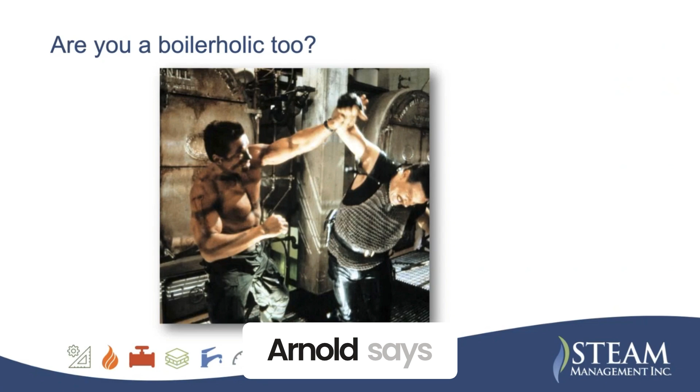Good morning, everybody. Like Chase said, I'm an author of different boiler books and a columnist, and it breaks down to I'm a boilerholic. You're thinking, what is a boilerholic? Well, when I first found out I was a boilerholic, I was watching this iconic movie with Arnold Schwarzenegger and the Chainmail guy. In the movie, they have green steam coming out everywhere, and I'm thinking, wow, green steam. Then at the end of the movie, Arnold rips a pipe off the side of the boiler and throws it right through Chainmail's stomach, and you see this wisp of steam coming out. Arnold says, I'll be back, or he says, let off some steam, Bennett. Right then and there, I thought, oh, that's wrong. Who's servicing these boilers? This is horrible. So it's an affliction I have, and I'm fascinated with boilers, and I hope you are, and have fun with me along the way.

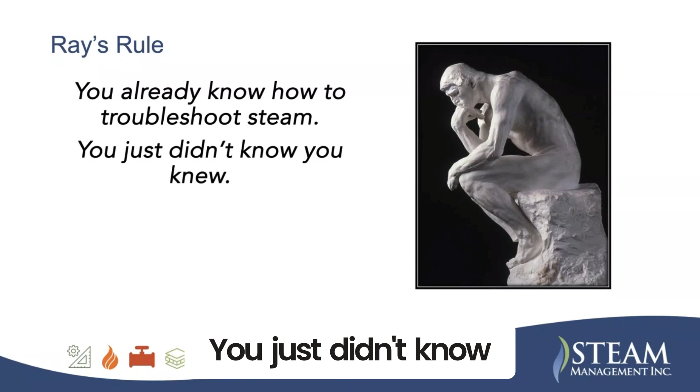When I talk to people and they ask about steam, steam seems to be something that they're confused about. But I have this theory that you already know how to troubleshoot steam, you just didn't know you knew. We're going to go through some of it this morning.

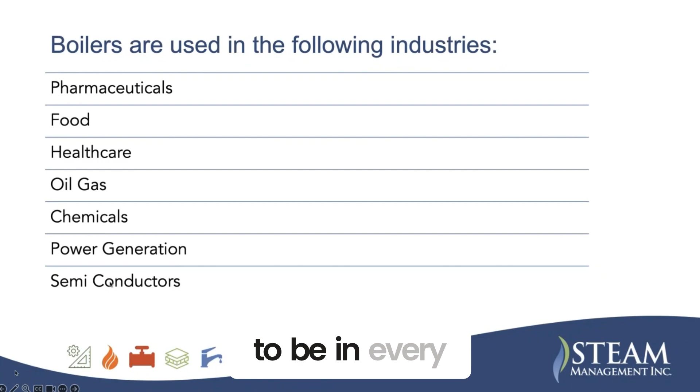Boilers are used, they touch every aspect of your life. They're used in all kinds of different facilities, and they used to be in every building that was heated. But most importantly, I think the biggest bonus for steam boilers is it makes beer. How could it be bad then, right? It's got to be a good thing.

Now I hear people say, 'Oh, steam is not efficient.' People will tell me that all the time, and I say, well, let's look at the Empire State Building in New York City. It's 102 stories high, 1,250 feet high. It heats the building on 2 to 3 pounds of steam. It won a LEED Gold award for efficiency.

And people are like, well, how could that be? That's impossible. Well, steam zooms through a building at speeds of about 50 to 60 miles per hour without using a fan, a compressor, or a pump. It works on steam pressure. And typically, if you're designing a system, for every 100 feet of piping, you'll lose about 2 ounces of steam pressure.

Another thing is, you think about steam or hydronics, water transfers heat 3,500 times better than air. Steam zooms through, like I said, at 50 to 60 miles per hour, without a compressor, pump, or blower. A 1 inch pipe can carry as many BTUs as a 20-inch round duct.

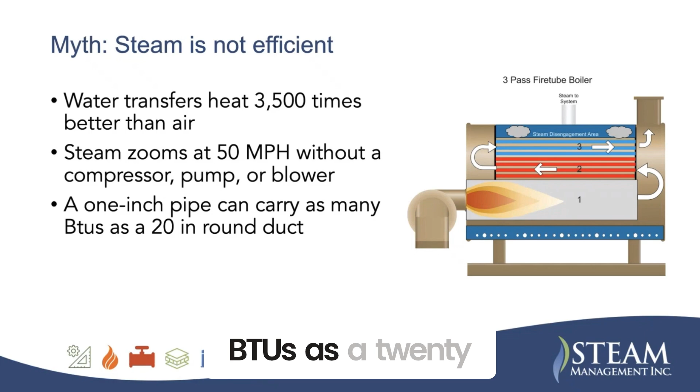Now, people say, 'Oh, boilers are dangerous.' Well, they used to be. They used to be very dangerous. Between 1879 and 1891, in that short 12-year period, there were 2,139 boiler accidents in the United States, one every 48 hours. Over 3,000 people were killed, 4,000 injured. And residential steam systems at that time operated at 60 psi, and they didn't have the operating controls and safety controls we have now. So at one time, they were very dangerous.

I found this on a copper fin boiler site, and they have since taken it down. The engineer doing it was trying to show how their boiler was so much safer than anyone else's. He had the horizontal water tube in the middle, and he said if the cast iron sectional blows up, it's equivalent to 32 pounds of dynamite. And if the horizontal fire tube blows up, it's 63 pounds of dynamite. He said if ours blows up, it's only 10 pounds of dynamite. Well, I don't know about you, but I don't want to be in a room with an ounce of dynamite. They've since taken it down, but I kept it so I can use it in my seminars.

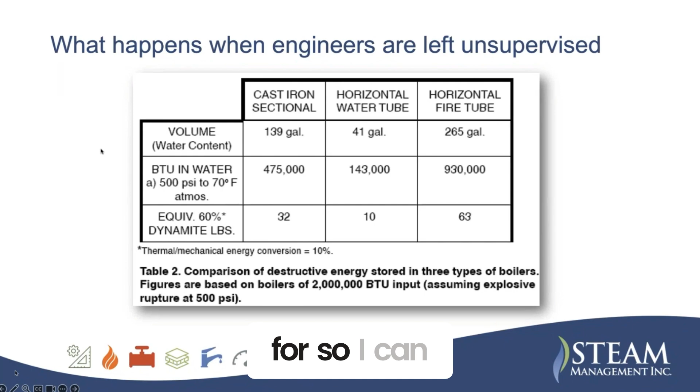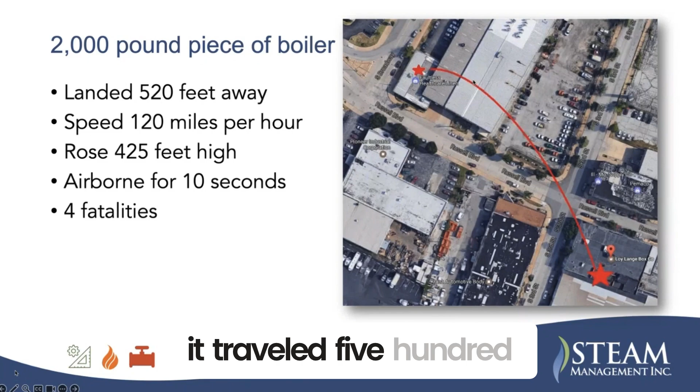But steam boilers can be dangerous. In this St. Louis explosion in 2017, 4 people were killed. It wasn't in this building here, wasn't the one where the steam boiler blew. The 2,000-pound piece of equipment was here, at the box company. It traveled 520 feet away at 120 miles an hour. It was 425 feet high, and it was airborne for 10 seconds. It landed at this healthcare linen place, and 4 people were killed because a piece of the boiler fell down on them.

And then I hear people say, well, boilers are still dangerous. Let me put it into context for you. 500 people die a year from hippos. 150 people die a year from falling coconuts. 100 people die from falling icicles. 13 people die from shaking a vending machine. Less than 10 people die from boilers a year. So you're 30% more likely to die from shaking a vending machine.

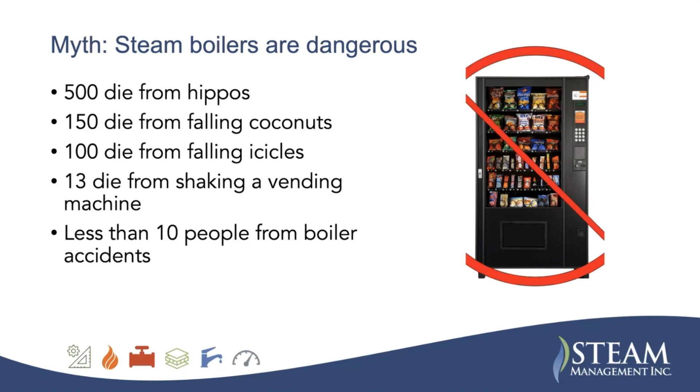I always wonder what it would be like for the person that died that way to go up to the pearly gates and compare notes on how they died. One said, 'Oh, I was hit by the coconut.' Another said, 'I was run over by a hippo.' And then they come to the person that had the vending machine fall on them. I think they'd put them on a little special couch and say, 'Don't talk to anyone else while you're here.'

Ray, that's why I love it. Sorry to interrupt—what maintenance activity do you think is the most crucial for avoiding an accident? There's a lot of maintenance activities going on, but what do you think is neglected the most that could cause an accident? Well, I think the low water cutoff—that's the leading mechanical cause of boiler failures. It should be checked, opened up, and inspected yearly. People just don't do it anymore.

Yeah. Okay. Great. I totally agree with that.

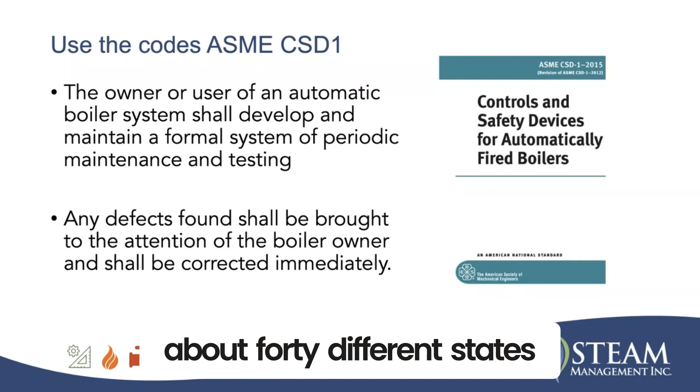ASME CSD1 is in about 40 different states. It's a great code. I tell mechanical contractors or service contractors here, if your state adheres to this, you should get a copy of the code and give it to every one of your service technicians. These are boilers—ASME code CSD1 handles boilers up to 12,500,000 BTUs.

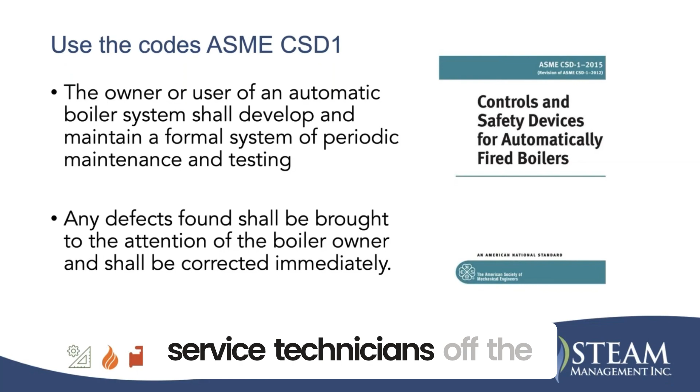The code says the owner or user of an automatic boiler system shall develop and maintain a formal system of periodic maintenance and testing. Any defects found shall be brought to the attention of the boiler owner and shall be corrected immediately. That lets your service technicians off the hook because they say, hey, this needs to be done. If you present the code to the owner, it's not you telling them it has to be done, it's the code saying it. It makes it easier.

Sometimes technicians get a little intimidated by building owners.

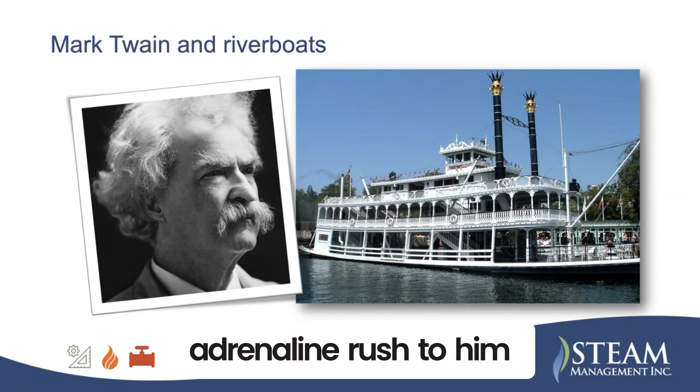When we were in grade school, we used to hear stories about Mark Twain on the riverboats. I thought, why would they even talk about that? He had such reverence and respect for them. What I came to find out was it was a 50-50 chance of a boiler blowing up when you were on a riverboat in Mark Twain's time. So it was an adrenaline rush to him—when he got off the boat and the boiler didn't blow up, he's like, yeah, we made it. Back then everything was done by hand, you didn't have all these automatic controls.

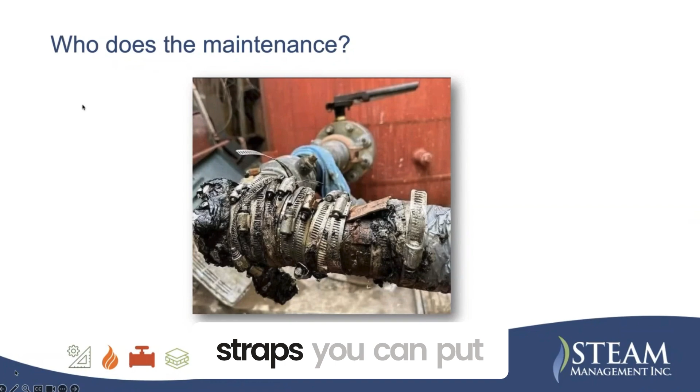Who does the maintenance? I'd love to find the guy that did this—this has to be in the Guinness Book of World Records for how many straps you can put on one pipe. I have people that'll say, well, we don't do maintenance.

There was a hospital I was talking with that said, I don't do maintenance, we have insurance. I said, well, do you mind if I read over what's not covered? So I went through this, and I'm going to read it really quickly. Then at the end, I'd love to hear your thoughts on what's covered.

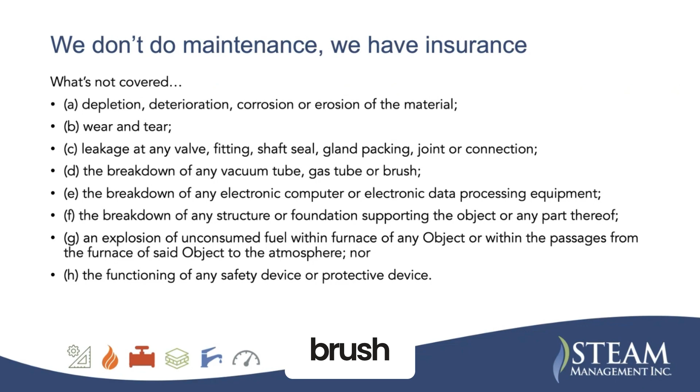Depletion, deterioration, corrosion of material, erosion of material, wear and tear, leakage of any valve, fitting, shaft seal, gland packing, joint or connection, breakdown of any vacuum tube, gas tube, or brush, breakdown of any electronic computer or electronic data processing equipment, the breakdown of any structure or foundation supporting the object or any part thereof, an explosion of unconsumed fuel within the furnace of any object or within passages from the furnace to the atmosphere, the functioning of any safety device or protective device.

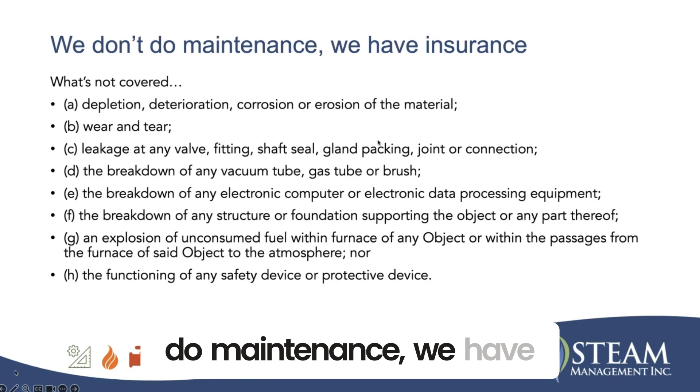What's covered under this policy? Nothing. And when do you typically find out what's covered under someone's insurance policy—before or after an accident? It's usually after the accident. So when a person says we don't have to do maintenance because we have insurance, ask to see their policy.

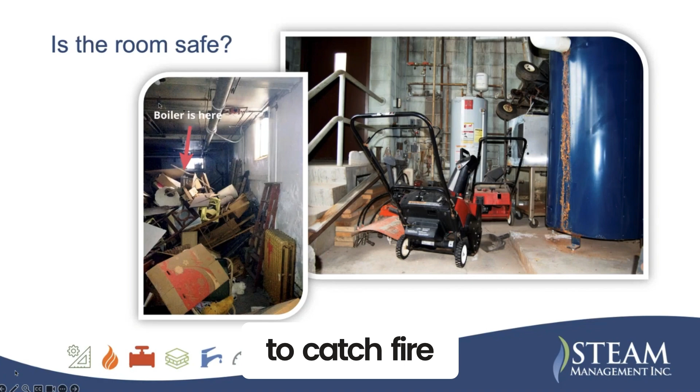The other thing—this is my church, and they never listen to me—I said, whatever you do, don't put gas powered or gasoline inside where the boilers are. The reason is that gasoline fumes are heavier than air, and they'll go right along the floor and get sucked into the boiler and cause it to catch fire. So look around the boiler room, make sure it's safe inside there.

Is there an emergency door switch? These are part of the ASME CSD1 code, and they're awesome. I recommend these highly. If your boiler doesn't have one, I'd urge you to get it in there.

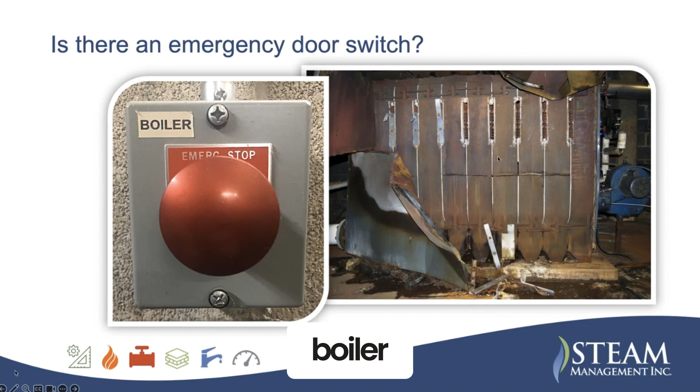They're lucky it didn't explode and take half the building with it. It cracked every section - the ones that aren't cracked on this side were cracked on the other side. All of this could have been avoided if the fire department had found the emergency switch, hit the button, let everything cool down, and figured out what was going on. As a result, it was about a $60,000 to $80,000 repair to replace this boiler, plus the dangers incurred.

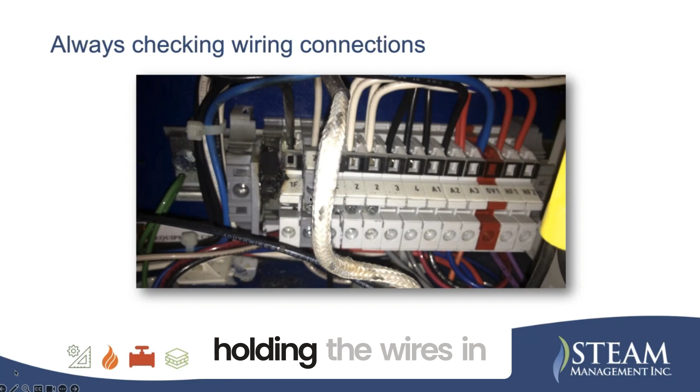Always check the wiring connections on the burner in the boiler. They loosen up after a while, and we check them twice a year when we're out on the job. You can see this one - it's a little tough to see - it completely melted the terminal where L1 was coming in, and we ended up having to change it over. This was a boiler only a couple of years old, and it happened because the screws holding the wires in place were not tightened.

Look for sagging pipes inside the boiler room, where if the hanger came loose, or it's just naturally dropping down, that allows water to pool inside the pipe.

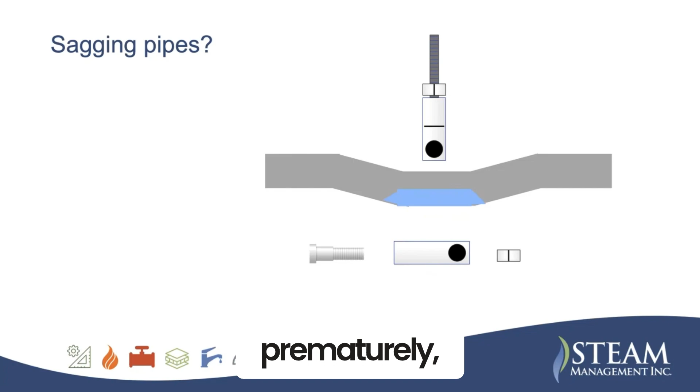When steam hits this pooled water, it causes a phenomenon known as condensate-induced water hammer. I'll show you two examples - Kirsner.org are experts in this, and these images are from their website. It can generate pressures as high as 1,500 psi. What happens is the steam hits the water and collapses prematurely, pulling it into a vacuum and sucking it in.

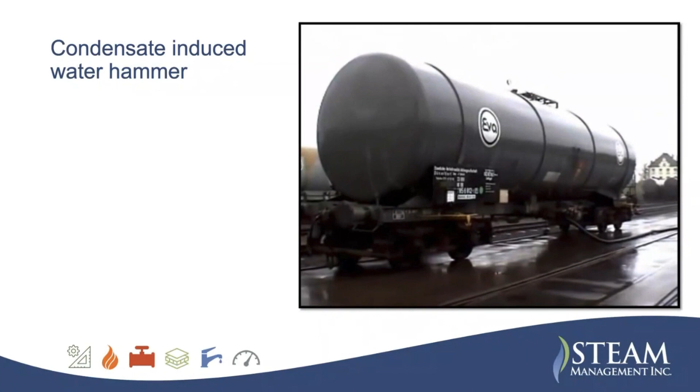You can see this - that's exactly what happens inside a pipe with condensate-induced water hammer. Your pipe is designed not to burst outward, but inward - it sucks it right in just like this. I told you I'm a boilerholic, I collect this stuff. This is crazy.

But anyway, it's scary. Is there carbon monoxide in the boiler room? Carbon monoxide is very dangerous. What happens is carbon monoxide displaces the oxygen in your blood's hemoglobin, forming what's called carboxyhemoglobin. The troubling part is that it has a 5 hour half-life.

Say we were exposed to 500 parts per million and we pulled you out of that building into fresh air - it would take 5 hours for the carbon monoxide level in your blood to drop to half that amount. After another 5 hours, it would drop in half again. Your body really prefers carbon monoxide to oxygen, so you want to make sure you're safe when you walk inside there.

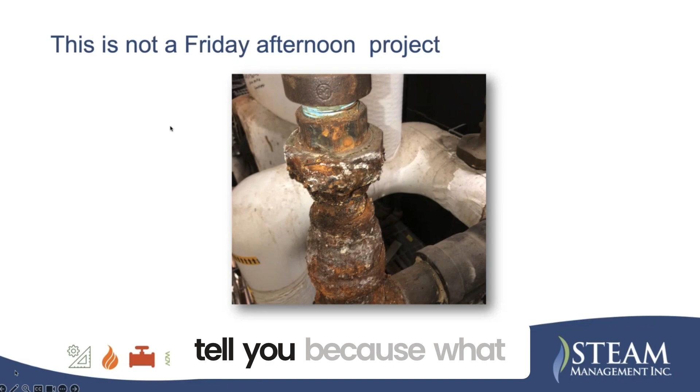Is this a good Friday afternoon project? I would not touch this. If you see something like this, it's a Monday project. I'll just tell you, because as soon as you touch this, everything's going to fall apart and you'll be scrambling all over town trying to find the repair parts to do this.

The low water cutoff is the leading mechanical cause of boiler accidents. The one on the left, you can see all the mud that's up in here. This float was just hanging on the mud, and the boiler dry fired.

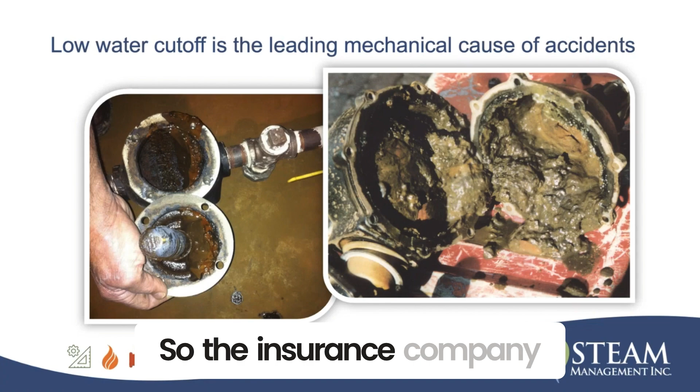It thought it was full of water, but the low water cutoff was actually full of mud. Now, this one, a friend of mine installed in a church in West Virginia. He sent me this picture on a Saturday night. This boiler was only about 9 months old. They had just replaced the boiler before it dry fired, and they never blew down the system or anything. So the insurance company paid for the first, and they told the owner they were only going to pay for

half of the second because they did no maintenance on it. And the owner says, 'Oh, we blow that down every week.' Well, you could see all the crap up in there. There was no way they blew this down. And the one on the right, a friend of mine sent to me, this was a low water cutoff, and you could see it was filled with sludge and mud. There was no way it was going to operate up and down.

Now, the float inside a low water cutoff looks like something inside the toilet bowl on your toilet. So it's a little float that's going to go up and down. That's just what this is here.

Inside the McDonnell Miller 150, these are really common on steam boilers, and we see them. What this has is two switches. This switch over here, the closest to the bottom, is the low water cutoff. This goes in series with all of your safety controls, like the operating control, your limit control. The one on here is what brings on your feed water pump or your boiler feed system.

Now you'll notice that there's some wax that they put on these. That's meant to tell you that you're not supposed to touch these. I've had service technicians that will remove that and try to adjust this up or down, and it doesn't really help. It puts you in responsibility for this, and you don't want that to happen.

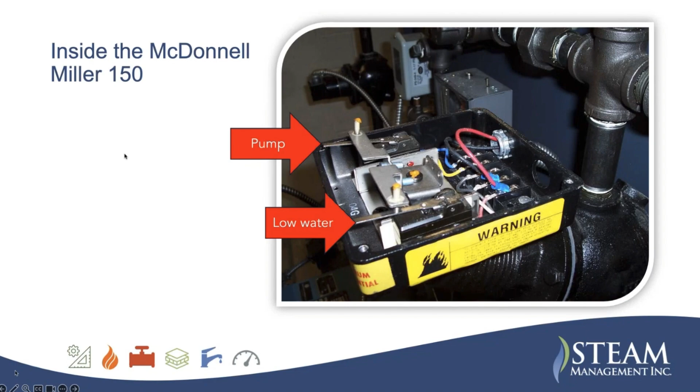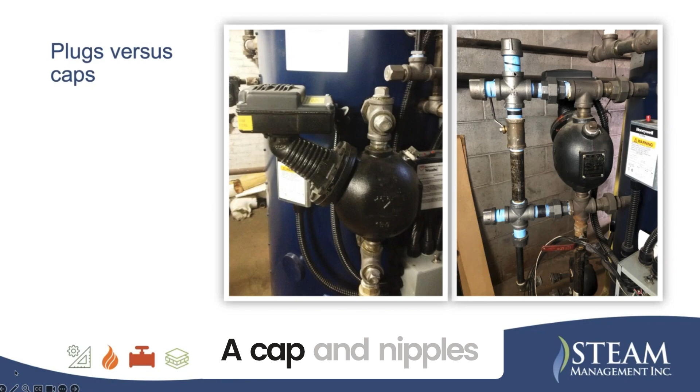What I tell people when I'm talking to service technicians or installers, what I'd love to see are plugs or caps and nipples on the end of the piping going into your low water cutoff. If you have plugs on here, if this side's going to be exposed to steam, this one's going to be down here lower, it's going to be in hot water. These things will rust off. It's really tough to get these out. So if you have a cap and nipples, it's a whole lot easier to remove this.

These have to be opened up every year. This is what senses the water level inside your boiler. This has to be removed. All these caps have to be removed, and this has to be cleaned to make sure it's not plugged so the boiler doesn't dry fire.

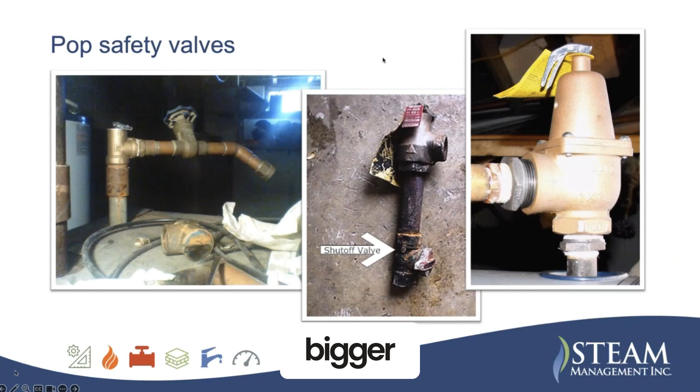Ray, I remember reading about one of the first major locomotive explosions. The stoker, which is what they used to call the guy that shoveled coal into the boiler, was annoyed that the safety relief valve was whistling, so he shoved a rag in it. Oh my goodness, it caused the boiler to explode.

So yeah, no restrictions anywhere in the safety relief, as well as the low water cutoff that you were showing. Can't put any valves on that either? No, oh you can, you're allowed. I mean, you're not allowed to do it, but this is America, and you can do whatever you want sometimes. You're entitled to do dumb things.

The pop safety valves - when I'm doing my classes, I'll look around and say, 'How often do you test your pop safety valves?' And nobody wants to make eye contact with me because nobody does it. I'll ask the group, 'Well, why don't you do it?' And everyone's response is the same: 'If I test it, it will leak.' So you never want to do it on a Friday. These are always a Monday morning job, so you can find a pop safety valve.

So how often should you test it? Watts recommends once a year. Conbraco, which is Apollo, recommends twice a year. And Kunkle says safety relief valves should be operated only often enough to assure that they are in good working order. I have no idea what that means, and I don't think it was an engineer that wrote that. I think it was a lawyer that said, 'Okay, we're going to put this on there and this should take care of it.'

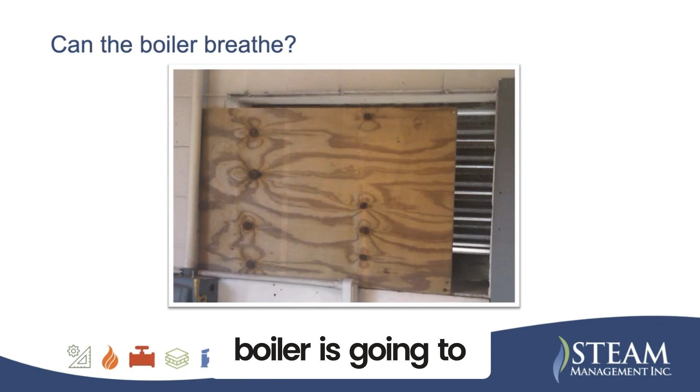Look for leaks. Do you see steam coming out? If you do, get them fixed. It'll destroy your boiler and piping pretty quickly.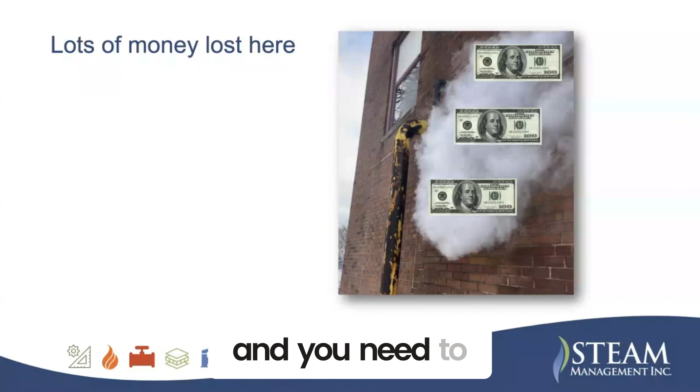This was a relief valve at a school we were looking to consult on, and I saw all the steam coming out of here. I told the guy, I said, 'That's money. That's money you're losing, plus all the equipment you're destroying.' And he's like, 'Oh, we don't have money to fix it.' I said, 'This thing will pay for itself.' So typically, if I see the vent pipe coming off of a boiler feed tank throwing that much steam, it's telling me the steam traps are blowing through and you need to have them fixed.

If you think about steam leaks, they're all coming through at choked flow when they first form, so it's as high a velocity as could possibly go through there with the pressure, and so they erode the pipe even further. It quickly makes the situation worse. That's why the safety relief valves leak, like you were saying - they erode the seal there.

But while I'm already interrupted, we did have a question: any recommendations on condensate and feed water quality? So you can address that now, or if you talk more about that later, you can address it, but just wanted to point that out.

What I would do is talk with your boiler manufacturer about what they recommend, because it's going to be different for each one. Just to use an off the cuff example, what I typically do is pull up the manual for the boiler and show them what they want to do.

One thing I can't urge enough: if you're going to do water treatment, which is recommended for any boiler, make sure you find someone that knows boilers. We had a guy in West Virginia at a university who bought water treatment chemicals from the guy that sold him his cleaning chemicals.

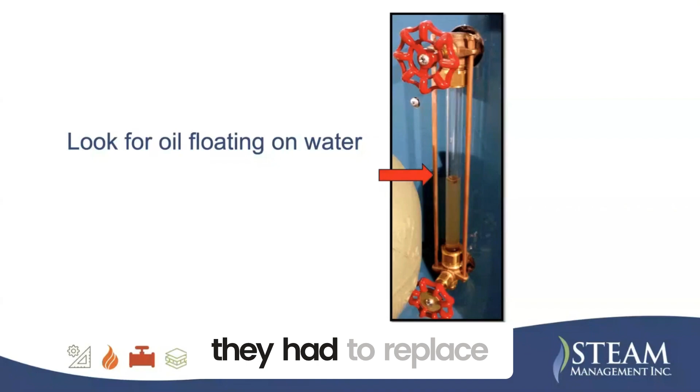He talked them into buying this descaler for inside the boiler, and they said, oh, this will make your boilers just like new. Well, they put this descaler in, and within about a month they had leaks everywhere, like a sprinkler system. The descaler did its job and pulled the scale off, but the scale was the only thing holding the piping together. They had to replace all the boilers in one building and almost a mile of pipe. So make sure you find someone that knows boilers, if I can say that.

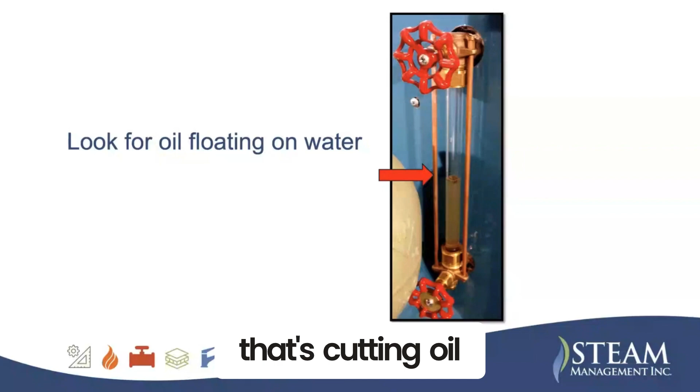When you're looking at the gauge glass, you can see where the red arrow is, that's oil on top. Oil will drive you crazy - it causes bouncing water conditions, carryover, and it will end up going off on low water. Typically the oil comes from piping work done on the boiler, which involves cutting oil, or if it's a brand new boiler, it's the oil used at the factory when machining the equipment. If you see oil, make sure you clean it out.

One thing I'll caution you on - I've had boiler maintenance people drain down the boiler and refill it with fresh water. Well, that oil adheres to all the metal sides on the water side of the boiler. So when you bring that water back in, it bounces right to the top of the water level and says, hey, I'm back. So you want to be able to clean that oil, and check with the boiler manufacturer for what they recommend.

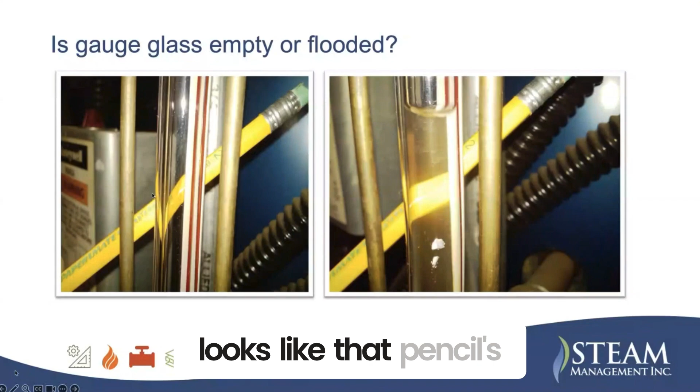How can you tell if the gauge glass is empty or full? One trick I learned from Dan Holohan, the boiler expert, is to hold a pencil behind the gauge glass. If you look on the left, it almost looks like that pencil's intact - that's telling me the gauge glass is empty. If you look on the right, it looks like it's broken on a 45-degree angle - that's telling me there's water in there. So if you hold a pencil up behind it, if it looks broken, it's flooded; if it looks pretty much straight through, it's empty.

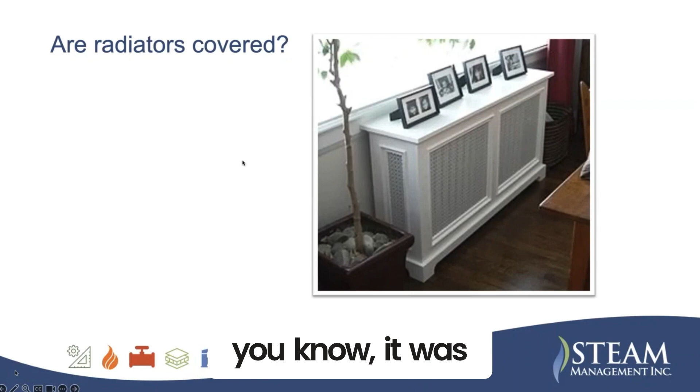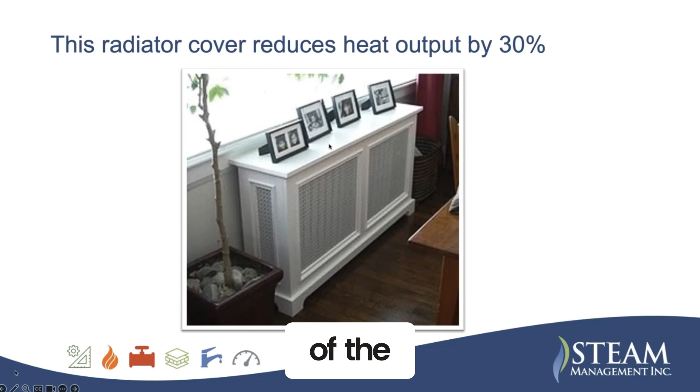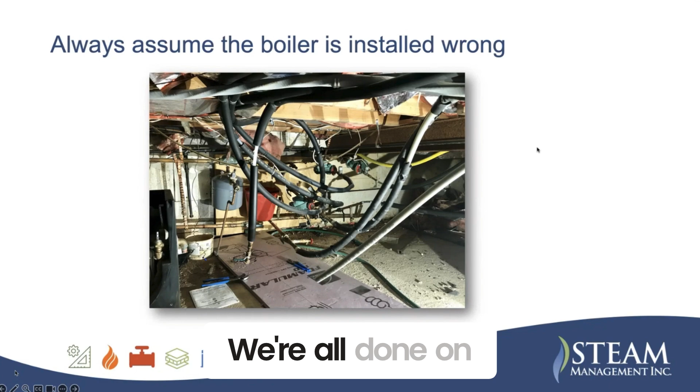Always assume the boiler was installed wrong. I can't believe the guy walked away from this and said, yep, we're all done on that job. So one thing I wanted to talk about - steam works opposite of what you think.

So if you're working on a steam system, yes... Hey Ray, sorry to interrupt, I got another question here. Building is heating differently at different areas of the building. Tried bleeding the system and it helped a little. Anything you recommend? What could be the problem?

Sounds like it's a hydronic system. You could probably reduce some of the flow to the areas that are overheating, and that'll force more water into the areas that aren't heating. Or you can make sure there's no air in the system - if you bled it, there is no air then.

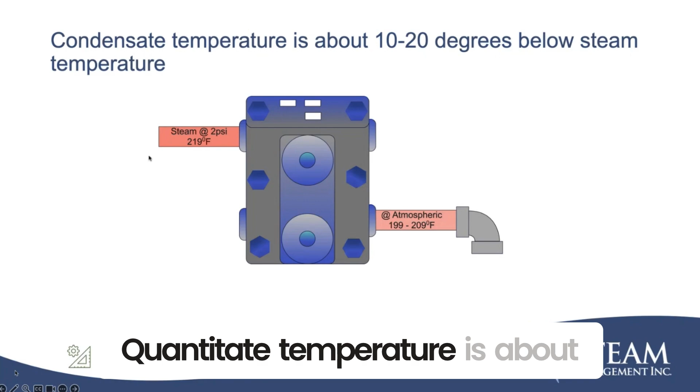Condensate temperature is about 10 to 20 degrees below the steam temperature. So if you know what kind of steam pressure you're running, say at 219 degrees, the condensate temperature is going to be about 10 to 20 degrees below that.

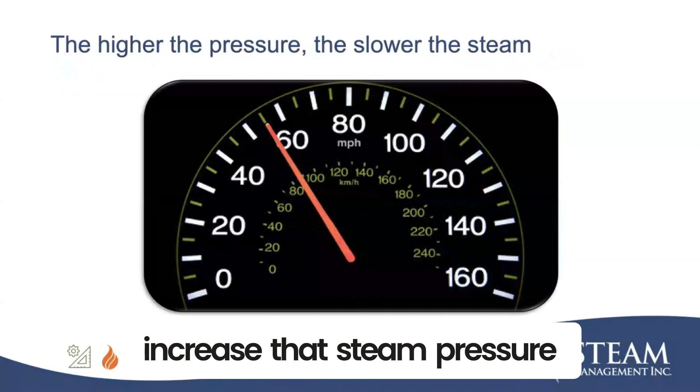The higher the pressure, the slower the steam, right? It goes against everything we're saying. We want steam to get there faster. You think, well, I'm going to increase that steam pressure. All that does is slow it down. Compare velocity. Say we have 100 psi steam pressure.

The velocity of the steam in a 2.5-inch pipe at 300 pounds per hour will be almost 10 feet per second. If we lowered that down to 15 psi, the speed increases up to almost 35 feet per second. So it's substantial. The idea is on a steam system, you want to keep the pressure as low as you can, so it'll get to the system faster.

But there's going to be an issue. We had a hospital here that had someone come in, and they had their system on the left, and everything was set for 100 psi, and they had the limit at 150.

And they said, hey, we have this great idea. We only need 100 psi when the laundry is running. When the laundry's not running, we don't need that much. So they put in a complete set of modulating controls and operating controls. So when the laundry shut down at 3 o'clock, they switched it over.

Now, what happened is as soon as they did that, they started noticing all kinds of carryover, bouncing water levels in the boiler. It was going off on low water.

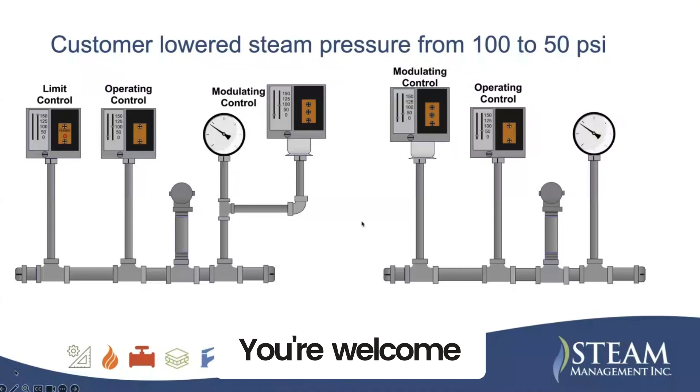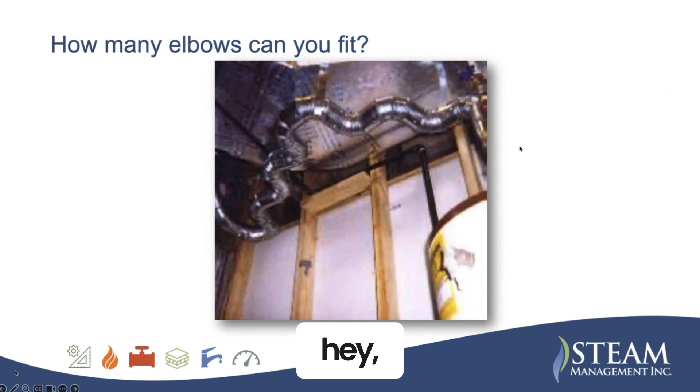How many elbows can you fit? I love this picture, Backrack gave it to me, came from one of their books, from an actual Polaroid, so it's not that good. The guy used 13, 90s to put this in there, and then he was so proud of it that he made sure it was hung up and kept this way. So if you see something like this, hey, there's a problem. We're getting close to the edge, close to the end.

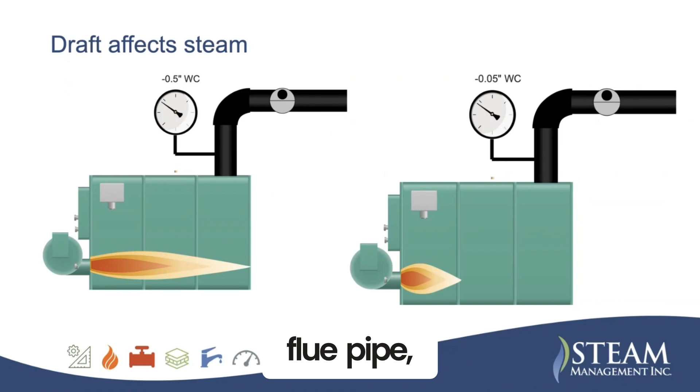Draft affects steam. I got called as a consultant in Wisconsin. They were having all kinds of problems with a boiler, it was tripping on low water all the time, and there was a lawsuit pending, so they brought me out as an expert witness. When I looked at the draft gauge, it read 0.5 inches water column. I said to the owner, it's supposed to be 0.05 inches water column. He said, what's the difference? I said, one is 10 times more than the other. So at 0.5, it was pulling the flames into the boiler and actually up into the stack. We found the barometric damper was too small. They had a 20-inch flue pipe stack and were running an 8-inch barometric damper. Once they put a 20-inch barometric damper on, the draft dropped and the boiler level settled right in. It was great. So draft will really affect the steam in your system.

Now I wanted to show you this just to show you how a chimney affects draft. This was kind of interesting, and then we can stop for questions whenever you want.

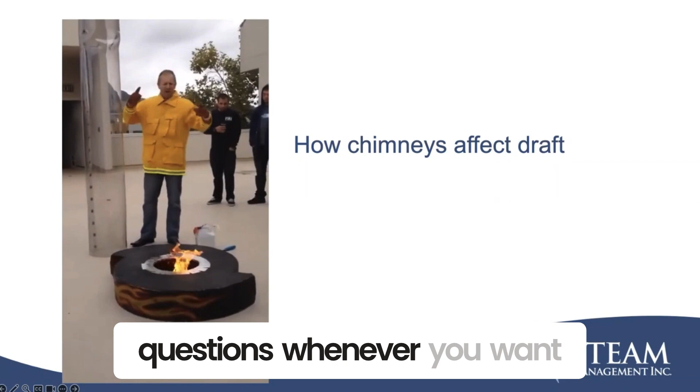Yeah, I don't have a life. I watch this stuff.

That's what a chimney does. It pulls your flue gases through your boiler and up the stack.

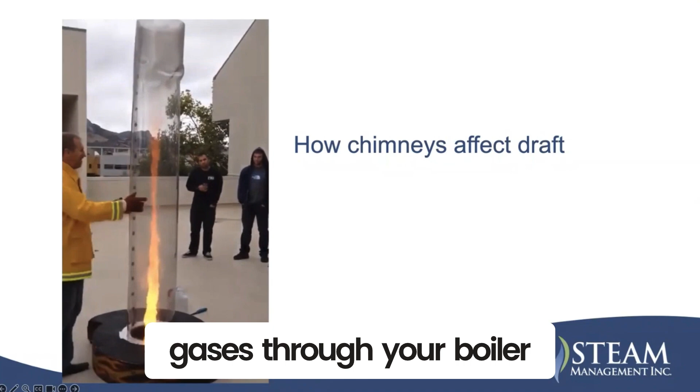Well, anyway, oh, what happened? I don't know, did I do that? Yeah, I was thinking it. We're still seeing your screen, so I think you just have to pull it back up. I don't know what happened there, let me find out. Okay, let me see why it's doing what it's doing, I'm not sure why. Let me get it back online again. I'm sorry. No problem, never had that happen before.

Here we are. Okay, everybody can see that?

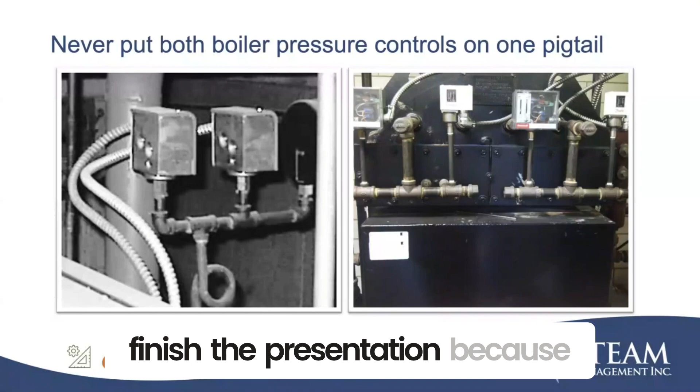Someone asked Ray, which safety regulation do you follow in the U.S.? We have Indian Boiler Regulation IBR 1950 in India. Oh my God, we have so many. Yeah, it's ASME.

It depends where you're located. We have so many different codes that you have to follow, so it just depends on your location, and they go by the versions too. Some states will have the latest version, some states will have versions from 6 or 8 years ago. So it's really hard to say one specific code. I hope I didn't mean to evade your question, but it is tough. There's also insurance standards, and different codes within the codes for different pressure levels.

I wonder if there's anyone from Honeywell here. Honeywell, I love them to death, but they do stuff just to mess with people. If you're looking at your pressure control, the two of these here - the one on the left with the mercury bulb is a subtractive type of pressure control, and the one on the right is what's called an additive. It really confuses people when you're going out there.

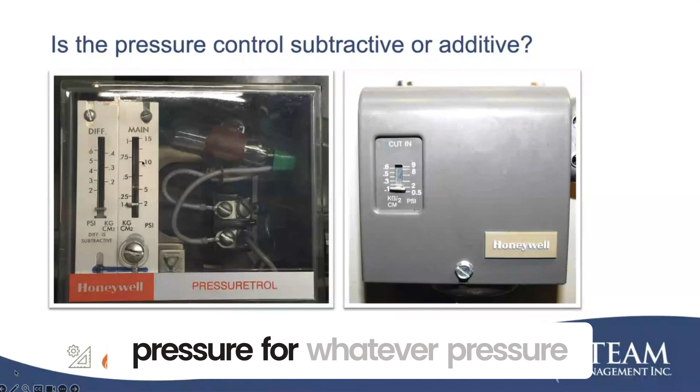What this subtractive one does is you set the pressure for whatever pressure you want, and that's where the boiler will shut off. So if we have this set for 5 and we set this for 5, the boiler will shut off at 5. Then it goes by your differential on this side. Say we have this set for 5 and this one's set for 2 - that means your boiler on a call for heat will operate between 2 and 5 psi.

This one is what's called a cut-in type. This is where the boiler starts. So we will set this for where the boiler starts - we want it to start at 2 psi - and then inside there's a differential adjustment on a little white knob, and you set it that way. So when you're looking at it and asking how do I set my pressure, you have to ask, is it subtractive or additive?

Here's what I talked about where Conbraco says, under no circumstances should this margin be less than 5 psi. So if this is a 15 psi relief valve, they don't want you running your boiler higher than 10 psi.

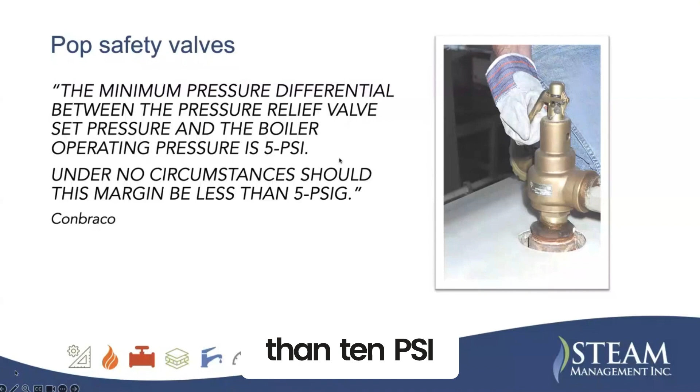If you get banging pipes - we see this a lot where they'll put in zone valves, and we kind of got rid of it as steam systems went away, but we still see this on breweries and other items. So what happens is, if you look at this system, they were having all kinds of banging. Like I said, you already know the problem, you just didn't know you knew it. What happens is when this valve shuts down here, the Honeywell on the right, all that condensate that's up in here - all the steam condenses and lays against this valve.

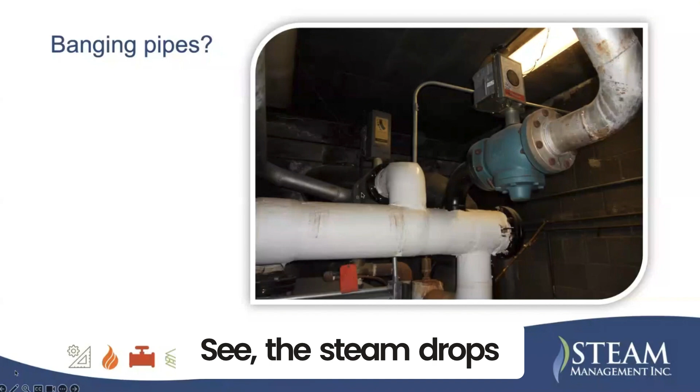So now when this valve opens up the next time they have a call for heat, what happens to all that condensate? It goes flying up here at 60 or 50 miles an hour and hits the nearest fitting. So if you have valves like this, you have to be able to drain this down and trap it so you don't have water laying against the seat of this valve. It depends which way it's pitching - if it's pitching to the right, like this one, you want to trap this side; if it's pitching back to the left, you want to trap this side. You want to trap it where the water is going to lay against the seat.

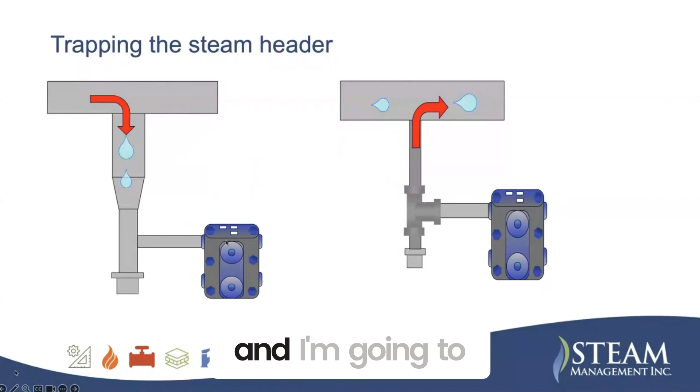A lot of times guys will say, okay, I'm going to trap this header, maybe it's a 6 or 12-inch header and I only need a 3/4-inch trap, so I'll just run 3/4 inch down here. But you do need the reducing fitting, because steam is zooming through at 50 or 60 miles an hour. It'll pull this condensate right up and along, so it won't be vented out through the trap. If you keep it at the same pipe diameter, the water drops down and there's no way the velocity is going to pull it out like a Venturi effect.

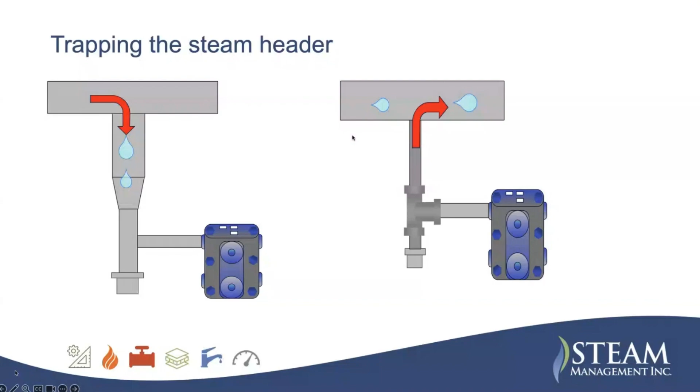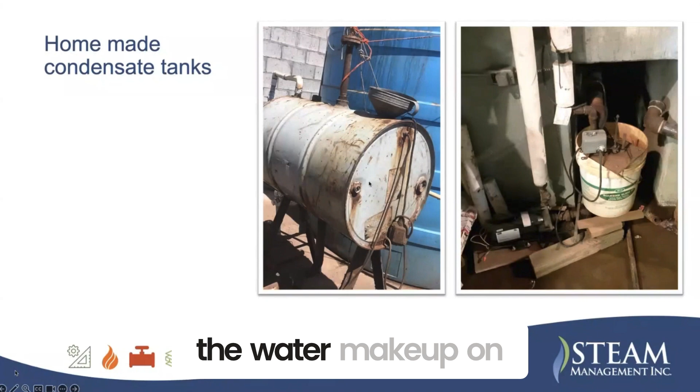This guy made a homemade boiler feed tank. I loved it - he got an old 55-gallon drum and put the water makeup on here. This one used this as a condensate tank. He used a plastic garbage bucket, and here's the pump down here. That's what he used because his condensate tank went bad.

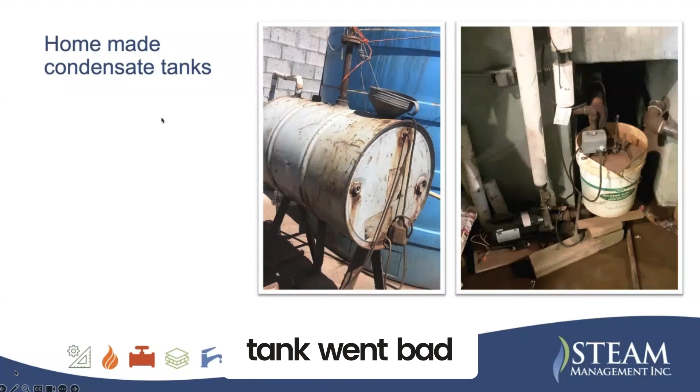Looks like he's got a rain - that funnel is like a rain collector or something.

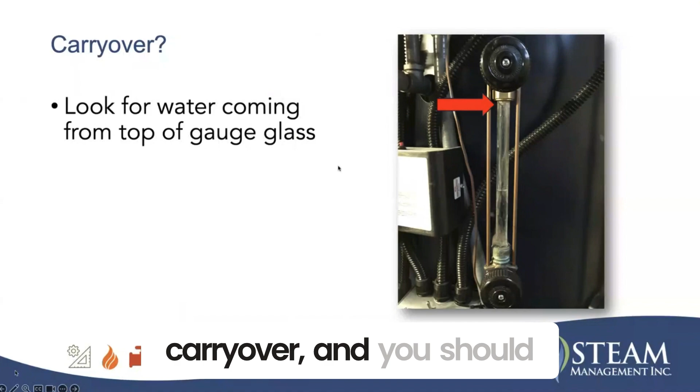One of the most confusing things is people will say, what's carryover? A metaphor I use for carryover is: let's say you're out camping making s'mores, you've got your marshmallows over the fire getting ready to put them between chocolate and a graham cracker, and some jerk comes running over and throws water on your fire and laughs about it. That's what carryover does - it takes all the energy out of the steam and causes it to condense a lot quicker than it's supposed to. One thing you can do to look for carryover is look at the top of your gauge glass. If you see water coming over the top and dripping down, it's telling you that you have carryover, and you should check it with the chemical treatment company.

What is carryover? This was done by Weil-McLain, and all this water up here is all carryover. I'm going to show you what this thing does - you can see it all coming up over here.

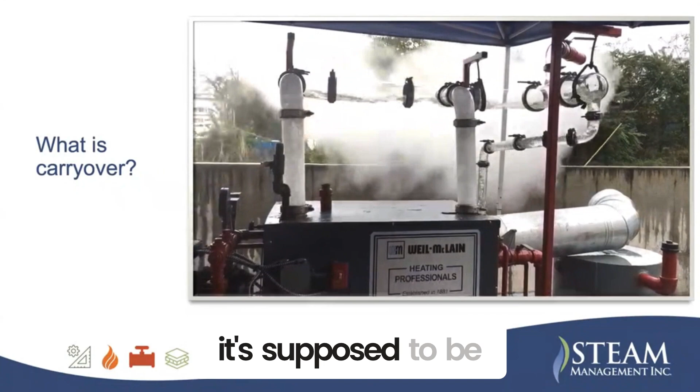That's carryover, and this boiler is piped the way it's supposed to be. It's got a 24-inch riser above here. On this particular one, they had one boiler piped like this and the other boiler piped like this. Why did they use the extra fittings here? Well, this is a swing joint. When steam piping is connected to a cast iron boiler, they expand at different rates. On this particular one, the steam piping expanded at a greater rate than the cast iron section did, so it pulled it all apart and they started having leaks everywhere. Whereas this swing joint allows it to go back and forth and absorb some of the expansion and contraction.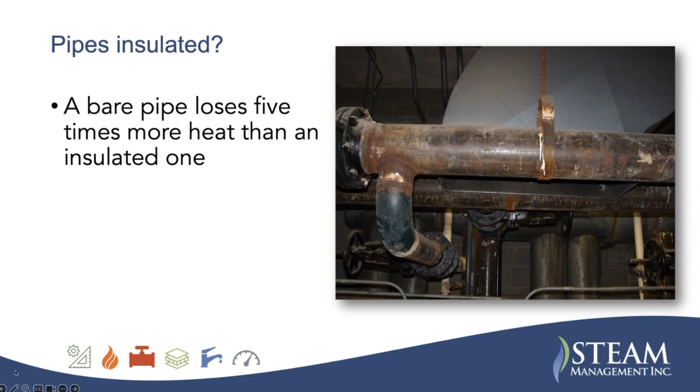Steam pipes need to be insulated. A bare steam pipe loses 5 times more heat than an insulated one. You might think that just makes a room warm, but what it does is cause your steam to condense, and it's this ripple effect - like pushing a snowball down a hill, it turns into an avalanche after a while, until you get steam stall and you won't be able to get your steam to flow through. An uninsulated pipe produces 600% more condensate than an insulated pipe, so it could overload the steam trap. Also, this steam trap was sized for an insulated steam pipe, and now it's not - if someone pulled the insulation off or repaired a leak, now it's undersized for the load.

Steam doesn't care about your flow arrows. I know you hate to hear that, but if steam's going this way and air's over here, it's going to go from high to low, no matter which way. So say it starts to condense over here and it starts to pull into a vacuum. The arrows say it's supposed to go to the right, but it's actually going to go shooting back to the left.

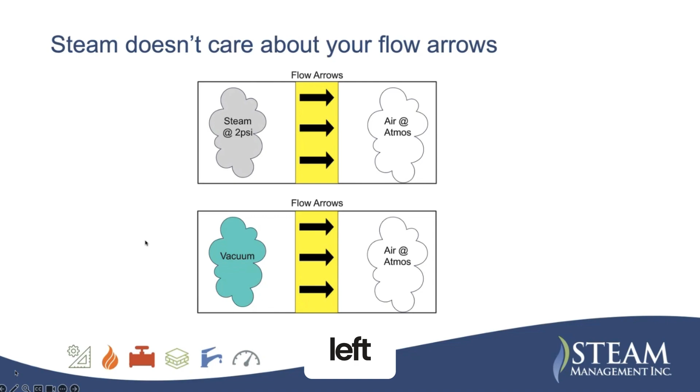Pressure goes from high to low. On this one, we have an insulated tank, and this one is non-insulated. So the steam flow is supposed to go this way. Well, if this is non-insulated, it's going to condense more. Your steam is actually going to come back this way quicker. It goes backwards. Steam systems need to breathe.

And that's why we saw that boiler feed tank or the condensate tank that exploded and it turned it into a bomb. When you look at a steam system, when it's cold, it's filled with air. Most of it, 90% of it's filled with air. The only thing that has water is the boiler and maybe the water line in the condensate tank.

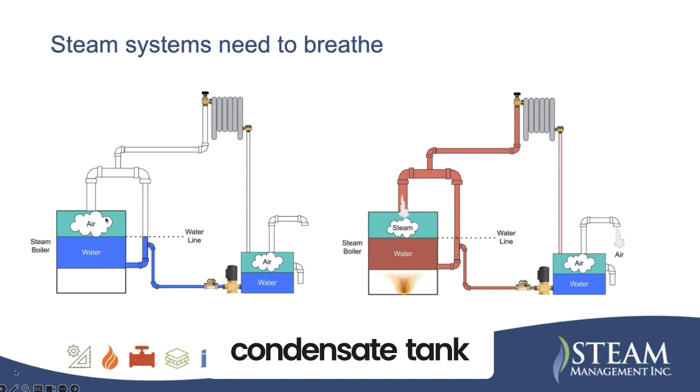So as we start to heat this up and it turns to steam - two gases can't occupy the same space. So the steam forms, it's a higher pressure than air, so it starts to push it out. And it goes up through the radiator, out the steam trap, and out the valve. So it pushes all the air out of here. So now when this thing is hot, it's all filled with steam. There's no air inside here, hardly any air.

So when it shuts off, all that steam condenses. Remember, it said that it was expanded at 1,600 times its volume. So now it will condense and drop down to 1/1600th of the space it occupied. So what's going to take the place of it? Air comes rushing back in and fills up the piping. So this thing is doing it all the time, back and forth.

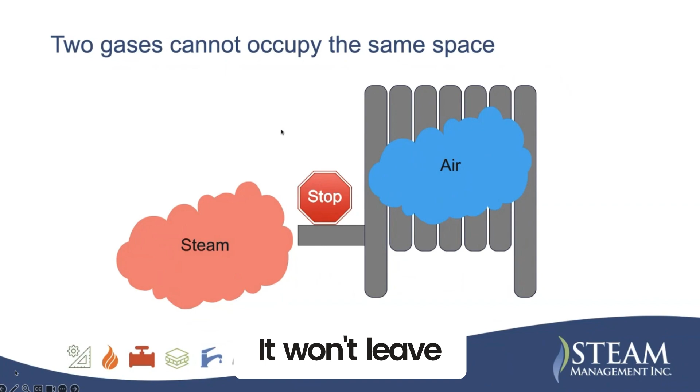And essentially, it's like breathing, is what I use as a metaphor. Like I said, two gases can't occupy the same space. If there's air in a radiator or in a pipe or in a piece of equipment, I can't get steam in there. It won't leave. And one of the things that's a little bit confusing about air is the warmer the air, the greater the volume. But with steam, the higher the pressure and temperature, the smaller the volume. So it likes to mess with your head a little bit.

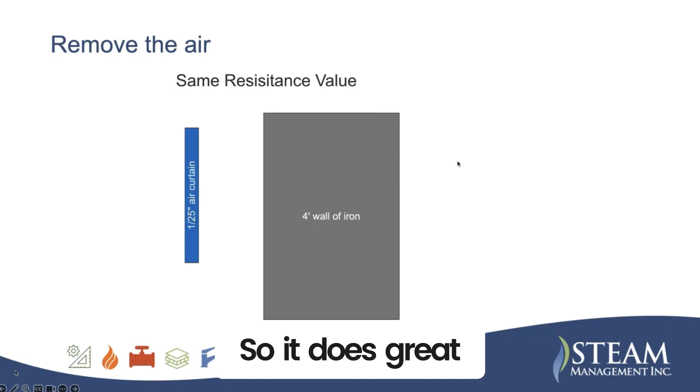We want to get air out of a system, out of a steam system. Just to give you an idea, you have a 1/25th of an inch air column, air curtain of air inside there. That has the same R value as a 4-foot thick wall of iron. So it does great insulation. That's why they put it between the window panes.

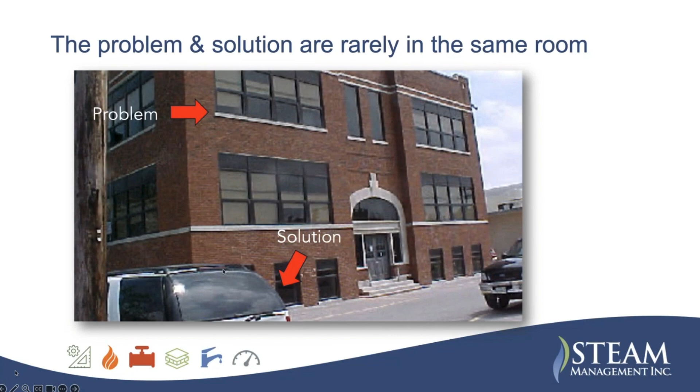The problem and the solution are rarely in the same room. We had a problem in this particular classroom on this school, and we found the solution down in the basement, down in here. What happens is when the condensate was coming down, it went down into the system, and one of the hangers fell off. They removed the asbestos down there, and it was sagging, so the air couldn't get out. Once we lifted that pipe up and put it back in the hanger, it ended up working just like it was supposed to.

What does a steam trap do? It vents air and non-condensables, but more importantly, it allows the system to breathe. So it vents air out when it's steaming, and it allows air back in when the steam is condensing.

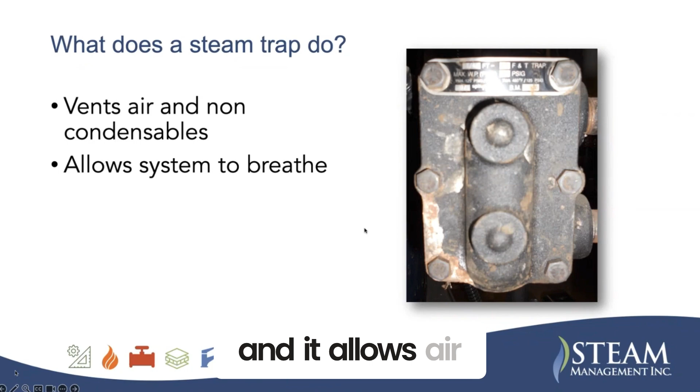Traps are workhorses. How long will they last? Well, a trap opens and closes about 360,000 times per heating season, or over 1 million cycles in 3 years. This is based upon 4,000 heating hours, which I have in my area.

I see people that have traps 20, 30 years old, but a lot of times the new ones aren't going to last nearly that long. Most experts say the thermostatic element, which allows the air out, lasts about 3 seasons, and the float lasts about 6 years.

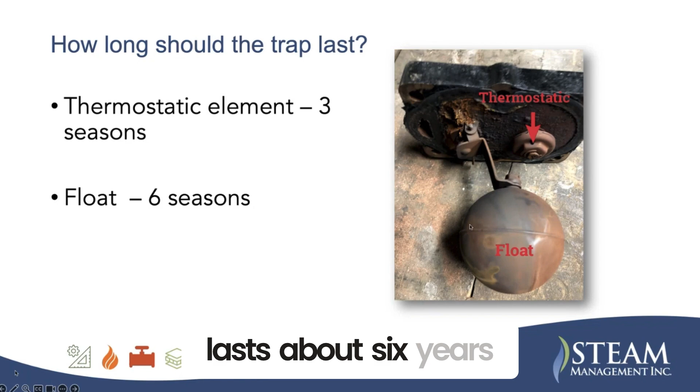Steam traps should never be sized for the steam pipe. Let's say we have a steam pipe going to the end of our building, and it's 800,000 BTU with 640,000 BTU out. We're trying to maintain about 40 feet per second in velocity. Anything over that, we could start getting carryover. So what that's telling me is we're going to need a 6-inch pipe here.

Well, what size should our steam trap be? If you look at the Spirax Sarco FT15, I can vent this 6-inch pipe. I can get the trap to the 6-inch pipe with a 3/4-inch trap. It'll give me 650 pounds of condensate, and that's what this thing is throwing out. More than that.

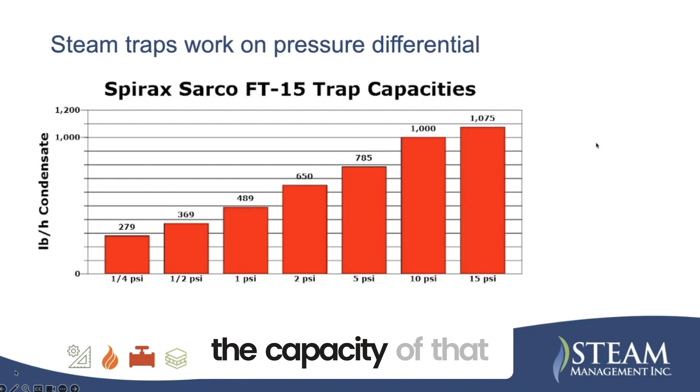The higher the differential pressure between the inlet and the outlet of the trap, the higher the capacity of that trap. One of the things we see is if you have 15 psi on the inlet of the trap and 15 on the outlet, is this thing going to move much condensate? No, hardly any at all.

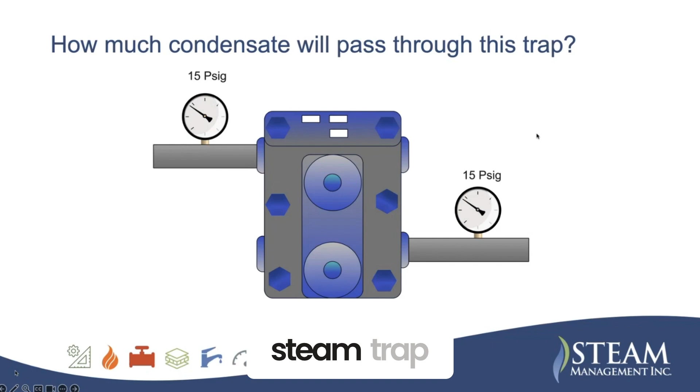And how would I get 15 psi on the outlet? Let's say the steam trap is bad on the next room down, and it's leaking steam into here. It could pressurize this condensate line. So you go in here thinking, oh my gosh, we got to change this trap out or this valve out. And every time you do it, it doesn't do any good, because it's actually the steam trap failing on the other one. So when I talked about the solution and the problem rarely being in the same room, this is what I meant by that.

Can we share steam traps? Well, you think, these are going to be expensive, a couple hundred dollars, so I can just put both of them on here. Well, you can do that, but you don't want to. The reason why is because if this one is blowing steam through here and this one has a lot of condensate, it's going to be throwing that condensate back up into here, banging on the tubes and destroying it. Each steam consuming piece of equipment has to have a steam trap. So I would need one here and here.

1 psi will lift condensate 2 feet. So steam will actually lift your condensate up. Say we have 2 pounds of pressure here, it will lift that water up about 4 feet. But to do that, this is going to cause a little bit of a seal, so we have to have an air vent on here, to get the air in and out of the system. We want a check valve on the outlet, and then we'll let the steam trap do it.

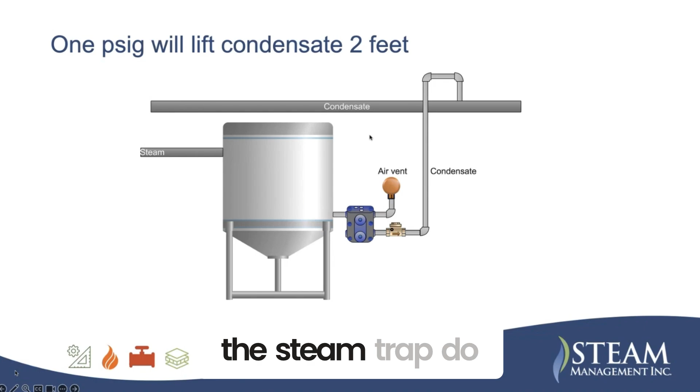This works fine unless you have a modulating valve on the inlet. Once you put a modulating valve in, you can't lift condensate anymore, because as this thing starts closing down, you don't have the steam pressure to lift that. So as it's closing down, all that condensate is going to be stuck in here. Next time this valve opens up, it's going to push all that condensate up and it's going to sound like a Blue Man concert. You're going to be having banging like you haven't heard in a long time.

Hey Ray, can I add a couple comments there? Certainly.

As I mentioned, we approach these systems looking for efficiency improvements. And for those of you that don't know, steam traps are kind of the LED lights, if you will, of the steam system. They're designed to fail open so that you're still rejecting condensate from the system when they do fail, and at that point they're just basically an open hole and you're losing steam. So maintaining and testing those traps is almost always a good opportunity unless it's just been recently done.

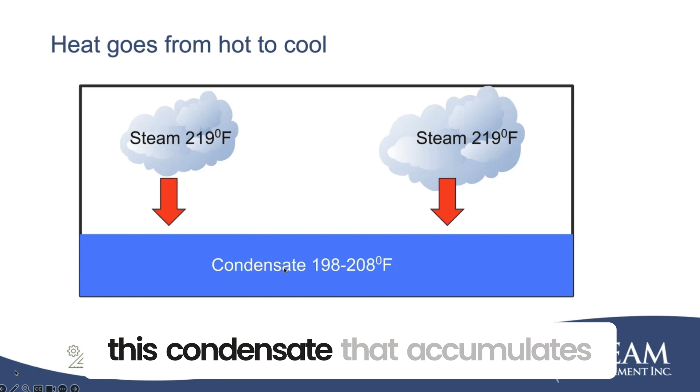So a lot of times we forget about that. If I have steam in this pipe and a lot of condensate in here, it's going to cause this to condense a lot quicker. That's why we want to get rid of this condensate that accumulates in the pipe.

So anyway, I guess that's it. If you need to contact me, you can email me or look at Boiler Room Detective. If there's anything, I thank you for your time and patience, and I hope I answered some questions. This was a 4.5 hour class I put into 53 minutes, so we'll see.